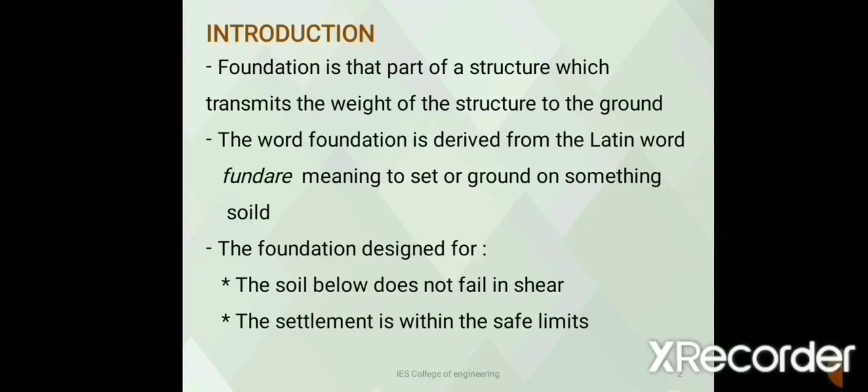We all know that every structure can be divided into two parts: the substructure and the superstructure. The major part of a substructure is the foundation, which transmits the weight of a structure to the ground. The word foundation is derived from the Latin word fundare, meaning to set or ground something solid. For every structure, the foundation must be designed with care. The major considerations while designing a foundation are that the soil below does not fail in shear and the settlement is within safe limits.

Now we are discussing what is bearing capacity of a soil. The stability of every structure is dependent upon the stability of the supporting soil. Every soil behaves in a complex manner when loaded, so it is important to know the bearing capacity of soils. The bearing capacity of any soil or rock is defined as its capacity to support the loads applied to the ground. It can also be defined as the maximum contact pressure between the soil and the structure.

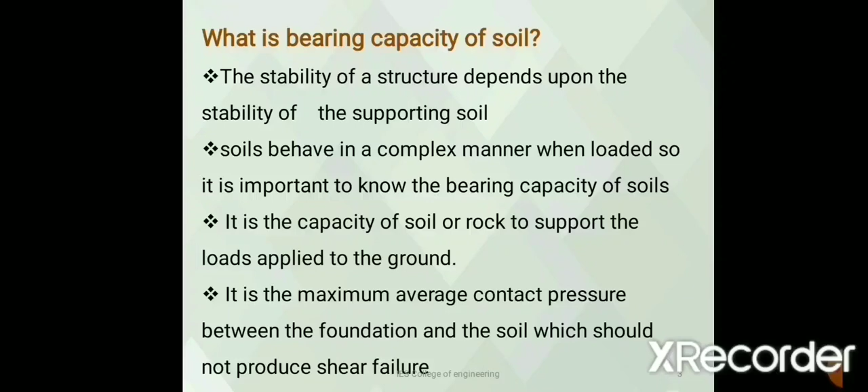So why is soil bearing capacity required? The stability of any foundation depends mainly on two factors: the bearing capacity of the soil beneath the foundation, and the settlement of the soil beneath the foundation. So it is important to know the bearing capacity of soils. The bearing capacity of any soil depends upon the shearing resistance of the soil, and the consolidation property of the soil determines its settlement characteristic.

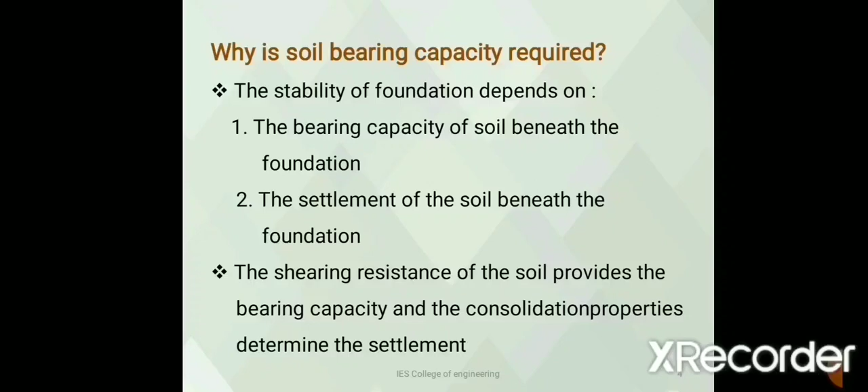Now we are discussing some basic definitions related to soil bearing capacity. The first one is ultimate bearing capacity, denoted by the symbol QU. The ultimate bearing capacity is defined as the gross pressure at the base of the foundation at which the soil fails in shear. The gross pressure includes the self-weight of the structure, overburden soil pressure, and all other loads acting on the foundation.

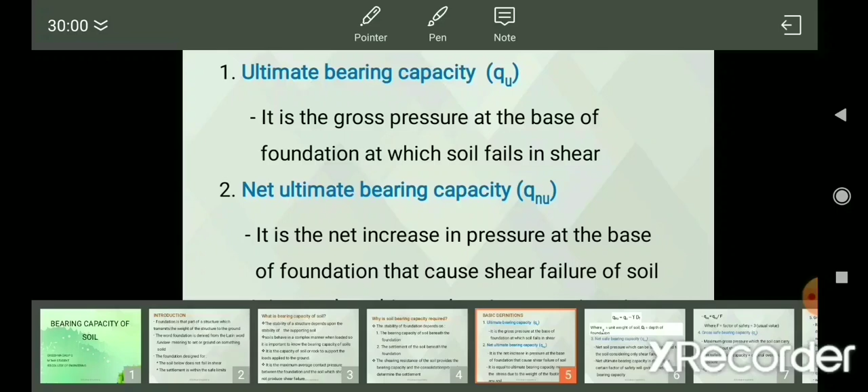The second one is net ultimate bearing capacity, denoted by the symbol QNU. It is defined as the net increase in pressure at the base of the foundation that causes shear failure of the soil. It is equal to the ultimate bearing capacity minus the stress due to the weight of the footing and any soil. Mathematically, QNU equals QU minus gamma dF, where QU is the ultimate bearing capacity, gamma is the unit weight of soil, and dF is the depth of foundation from the surface of the soil.

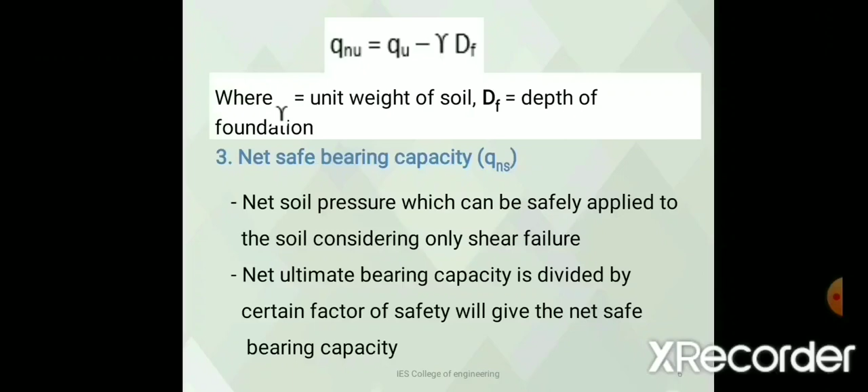The third term is net safe bearing capacity, denoted by the symbol QNS. As the name indicates, it is the net soil pressure which can be safely applied to the soil considering only shear failure. It is calculated by dividing the net ultimate bearing capacity by a certain factor of safety, usually taken as 3 for designing purposes. Mathematically, QNS equals QNU divided by F, where F is the factor of safety.

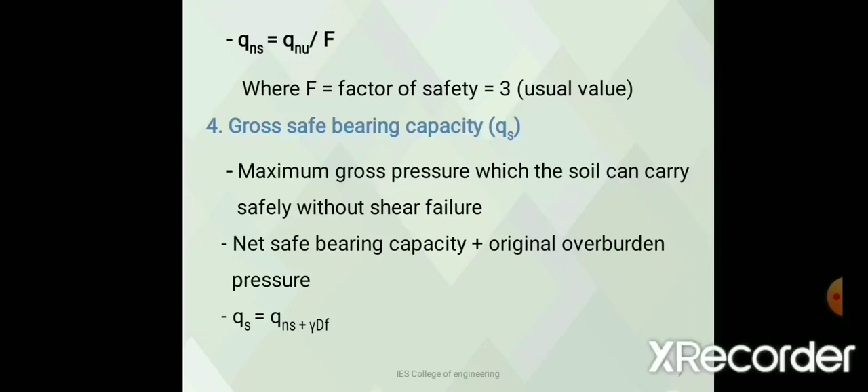The fourth one is gross safe bearing capacity, denoted by the symbol QS. It is the maximum gross pressure which the soil can carry without shear failure. It is calculated by adding the net safe bearing capacity and the original overburden pressure. Mathematically, QS equals QNS plus gamma dF.

The fifth one is gross pressure intensity, denoted by the small letter q. It is the total pressure at the base of the footing due to the weight of the superstructure, self-weight of the footing, and weight of the earth fill. The sixth term is net pressure intensity, denoted as Qn. It is the excess pressure, or difference in intensity of gross pressure after construction of a structure and the original overburden pressure. Mathematically, Qn equals Q minus sigma dash, where Q is the gross pressure intensity at the base of the footing and sigma dash is the effective overburden pressure.

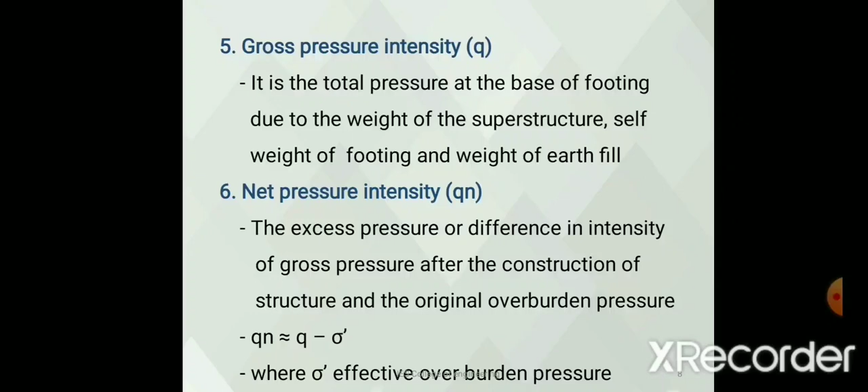The next one is net safe settlement pressure, QNP. It is the pressure with which the soil can carry without exceeding the allowable settlement. The maximum allowable settlement for every structure varies between 25 mm to 40 mm for individual footings. The net safe settlement pressure is also known as unit soil pressure or safe bearing pressure.

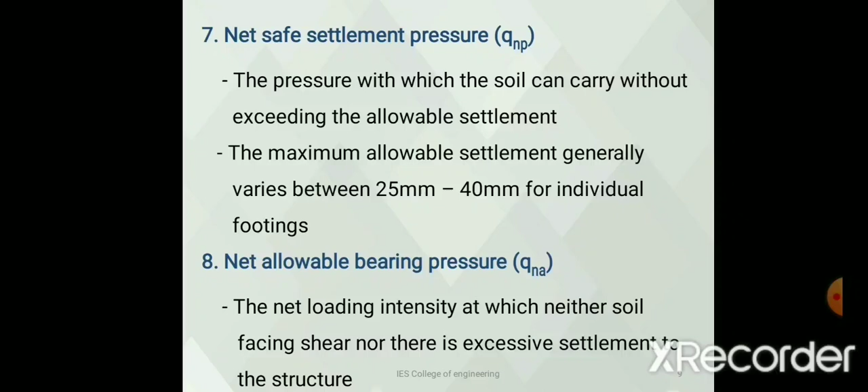The last one is net allowable bearing pressure, denoted by the symbol QNA. It is the net loading intensity at which neither does the soil fail in shear nor is there excessive settlement to the structure. In Terzaghi's bearing capacity theory, failure occurs when the downward pressure exerted by loads on the soil adjoining the inclined surfaces CB and CA of the soil wedge is equal to the upward pressure.

The downward forces are due to the load QU into B and the weight of the wedge, 1 by 4 gamma B square tan phi dash.

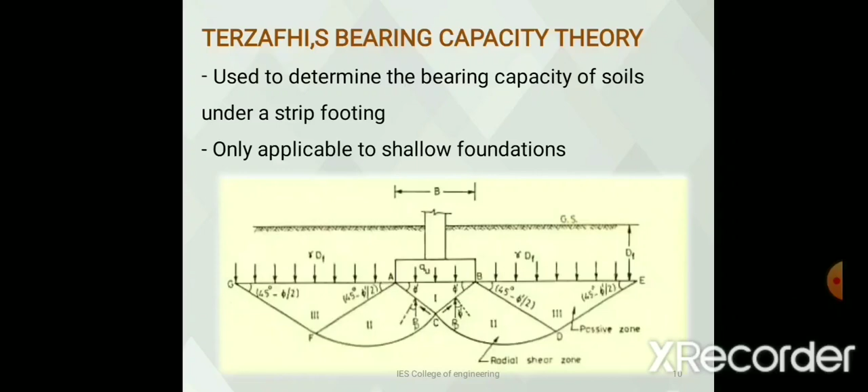The upward forces are the vertical component of the resultant passive pressure PP and the cohesion C dash acting along the inclined surfaces. As the resultant passive pressure is inclined at an angle phi dash to the normal to the surface of the wedge, it is vertical.

Therefore, from the equilibrium equation in the vertical direction, 1 by 4 gamma B square tan phi dash plus QU into B equal to 2PP plus 2 C dash into L sin phi dash, where L is the length of the inclined surface CB.

Therefore, QU into B equal to 2PP plus BC dash tan phi dash minus 1 by 4 gamma B square tan phi dash. The resultant passive pressure PP on the surfaces CB and CA constitute the following three components.

The first component is PP gamma, which is produced by the weight of the shear zone BCDE, assuming the soil is cohesionless, that is C dash equal to 0, and neglecting the surcharge Q.

The second component is PPC, which is produced by the cohesion component C dash of the soil, assuming the soil as weightless and gamma equal to 0, and neglecting the surcharge Q.

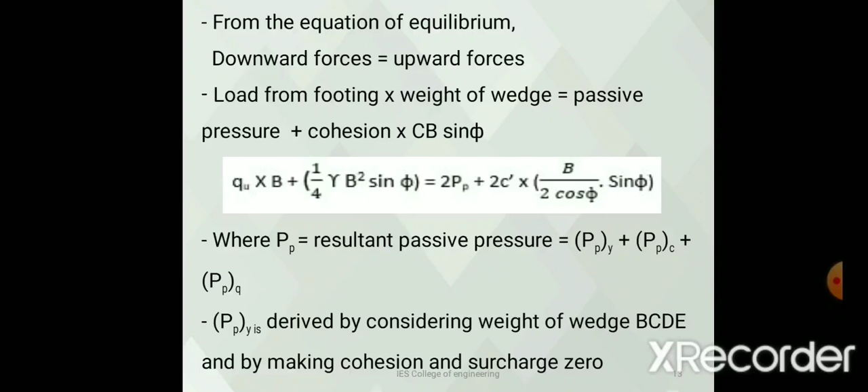Thus, the resultant passive pressure PP is taken equal to the sum of the components PPY plus PPC plus PPQ. So the resultant equation is QUB equal to 2 times PPY plus PPC plus PPQ plus BC dash tan phi dash minus 1 by 4 gamma B square tan phi dash.

Here, 2PPY minus 1 by 4 gamma B square tan phi dash equal to B into 0.5 gamma B N gamma.

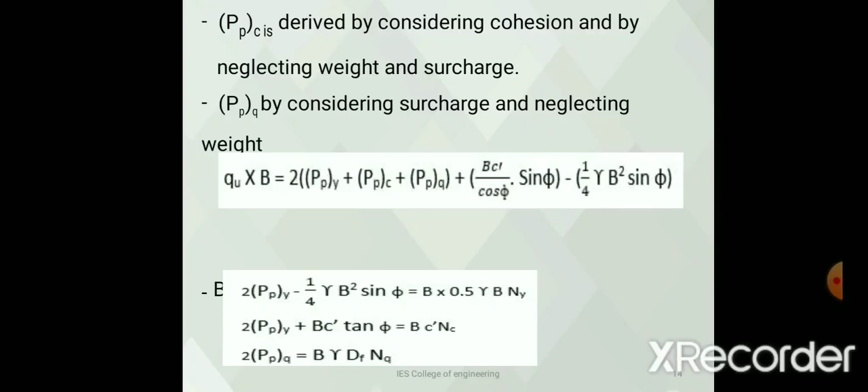2PPY plus BC dash tan phi can be denoted as BC dash NC, and 2PPQ equal to B gamma DF NQ. So the bearing capacity under a strip footing can be written as QU equal to C dash NC plus gamma DF NQ plus 0.5 B N gamma.

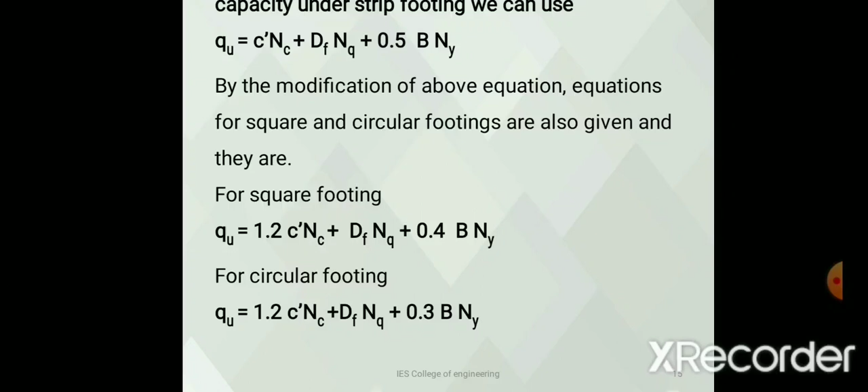By modification of the above equation, equations for square and circular footing are also given. For square footing, QU equal to 1.2 C dash NC plus gamma DF NQ plus 0.4 gamma B N gamma. For circular footing, QU equal to 1.2 C dash NC plus gamma DF NQ plus 0.3 gamma B N gamma.

So finally, QU equal to C dash NC plus gamma DF NQ plus 0.5 gamma B N gamma. This equation is called Terzaghi's bearing capacity equation, where QU is the ultimate bearing capacity, and NC, NQ and N gamma are the Terzaghi bearing capacity factors.

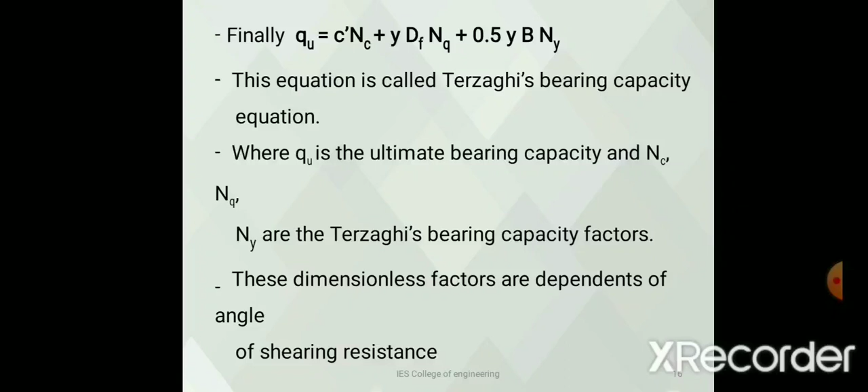These dimensionless factors are dependent on the angle of shearing resistance. The various equations to find the bearing capacity factors are NC equal to cot phi into A square divided by 2 cos square of 45 plus phi by 2 minus 1.

NQ equal to A square, all divided by 2 cos square of 45 plus phi by 2, and N gamma equal to 0.5 tan phi Kp divided by cos square phi minus 1, where A equal to e into 3 pi by 4 minus phi by 2.

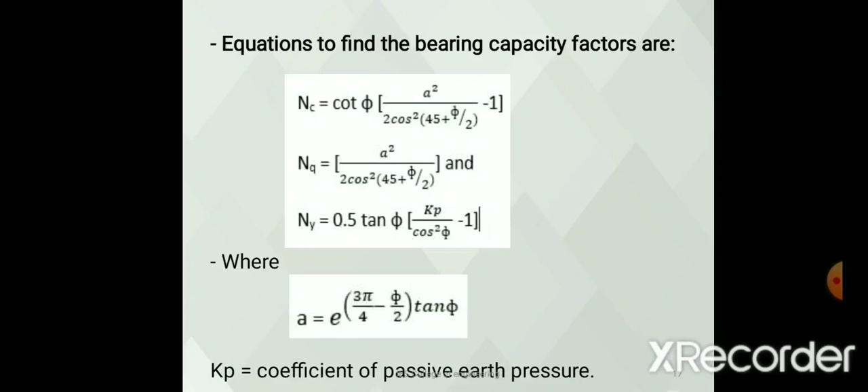Tan phi, and Kp is the coefficient of passive earth pressure.

So to determine the bearing capacity under a strip footing, QU equal to C dash NC plus gamma DF NQ plus 0.5 gamma B N gamma.

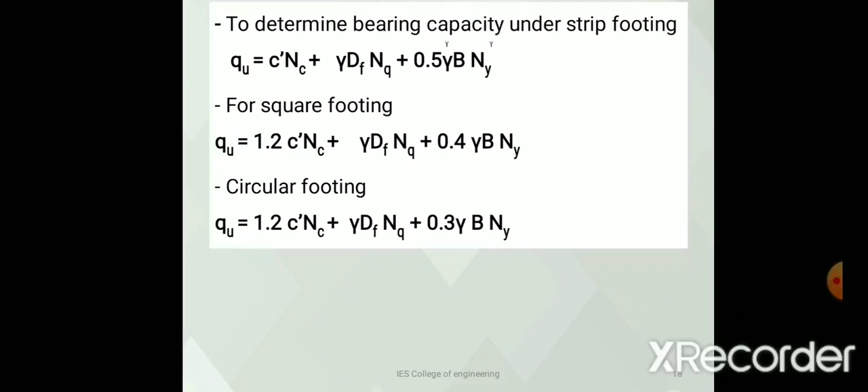For square footing, QU equal to 1.2 C dash NC plus gamma DF NQ plus 0.4 gamma B N gamma. For circular footing, QU equal to 1.2 C dash NC plus gamma DF NQ plus 0.3 gamma B N gamma.

So the next theory is Hansen's bearing capacity theory. Hansen modified the equation of Terzaghi by considering shape, depth and inclination factors.

According to Hansen, QU equal to C dash NC SC DC IC plus gamma DF NQ SQ DQ IQ plus 0.5 gamma B N gamma S gamma D gamma I gamma, where NC, NQ, N gamma are Hansen's bearing capacity factors, and SC, SQ and S gamma are shape factors, and DC, DQ and D gamma are depth factors.

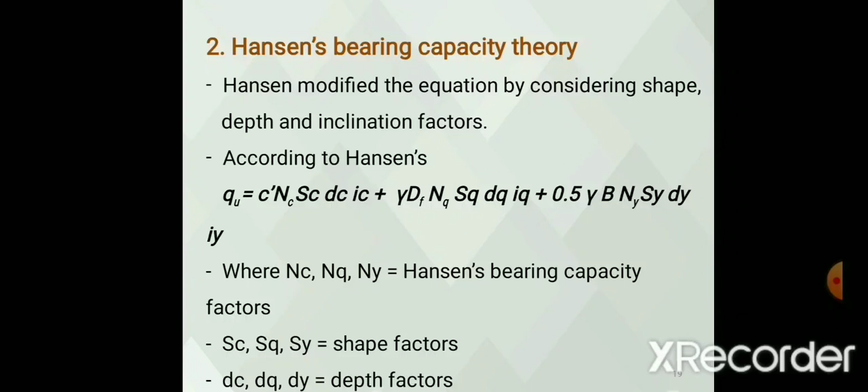So the bearing capacity factors are calculated as NQ equal to tan square of 45 plus phi by 2, e raised to pi tan phi. NC equal to NQ minus 1 cot phi. N gamma equal to 1.8 into NQ minus 1 tan phi.

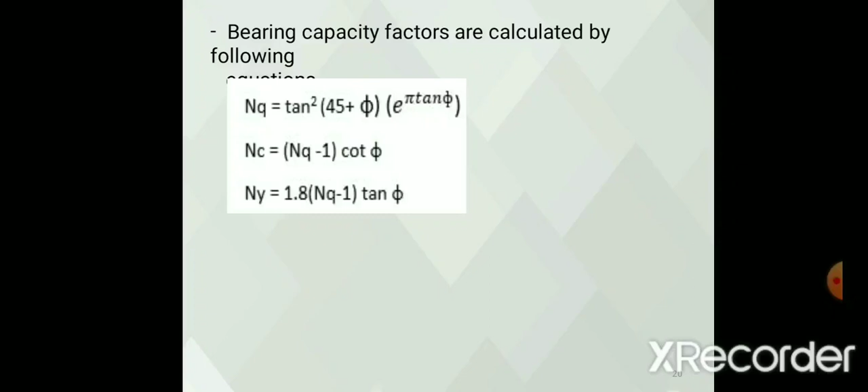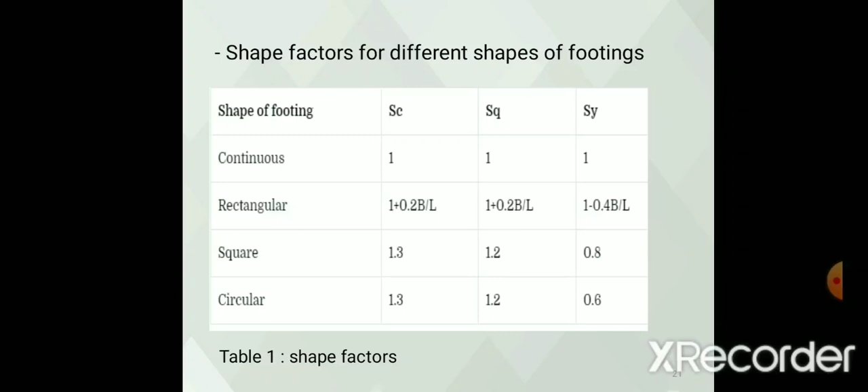These tables show the shape factors for different shapes of footings, and we can select the various shape factors from this table for calculation purposes.

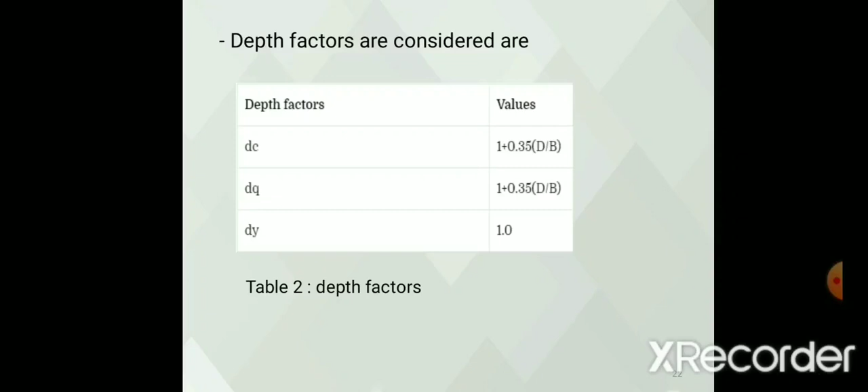This table shows the depth factors considered while designing any type of foundation, and these are the inclination factors considered while designing, where H is the horizontal component of the inclined load, B is the width of the footing, and L is the length of the footing.

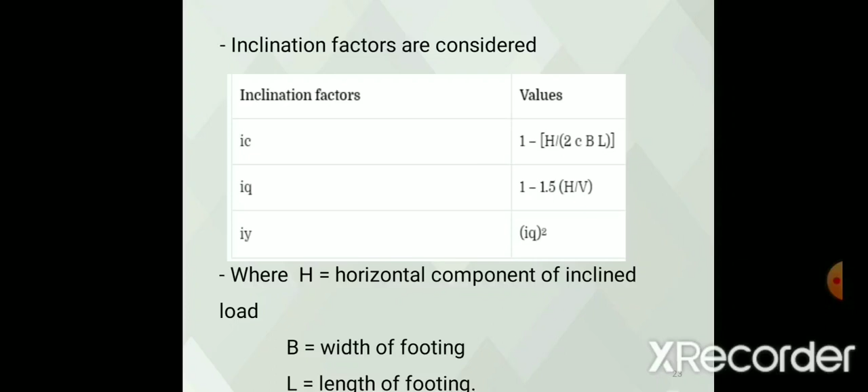Now we are discussing various types of shear failures. Vesic classified bearing capacity failures into mainly three types: the first is general shear failure, the second is local shear failure, and the third is punching shear failure. So first of all, we are discussing the features of general shear failure.

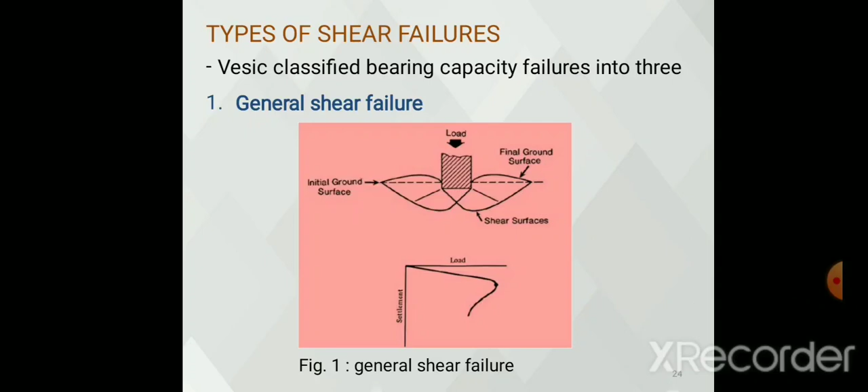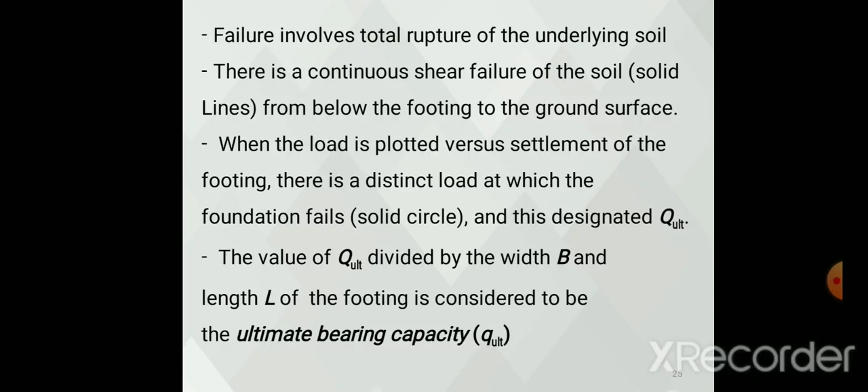The general shear failure involves total rupture of the underlying soil. There is a continuous shear failure of the soil, shown as solid lines from below the footing to the ground surface. When the load is plotted versus settlement of the footing, there is a distinct load at which the foundation fails, shown in the figure as a solid circle, designated as Q ultimate. The value of Q ultimate divided by the width B and length L of the footing is considered to be the ultimate bearing capacity. This has been defined as the bearing stress that causes a sudden catastrophic failure of the foundation.

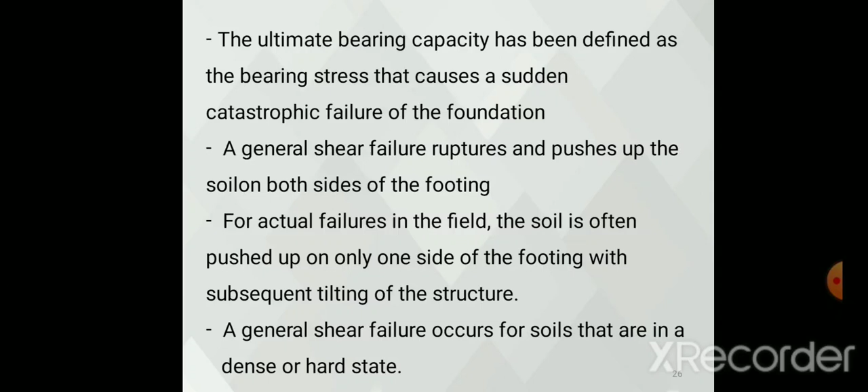A general shear failure ruptures and pushes up the soil on both sides of the footing. For actual failures in the field, the soil is often pushed up only on one side of the footing, with subsequent tilting of the structure. A general shear failure occurs for soils that are in a dense or hard state.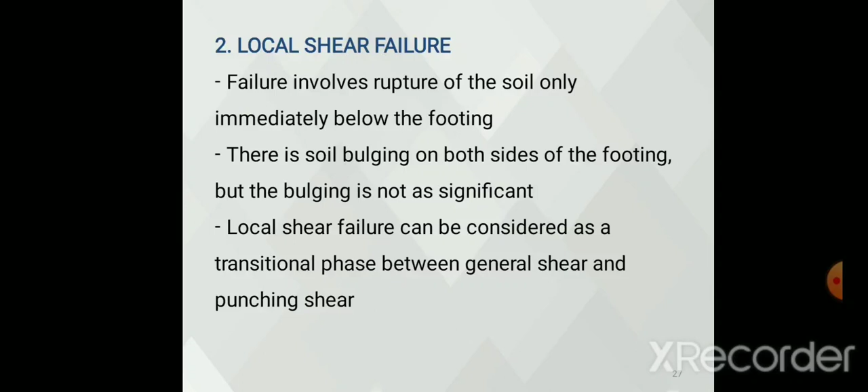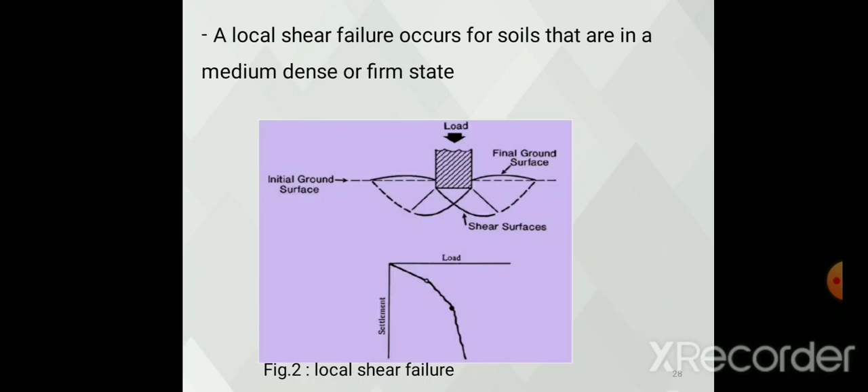The second type of failure is local shear failure. It involves rupture of the soil only immediately below the footing. There is soil bulging on both sides of the footing, but the bulging is not as significant as general shear failure. Local shear failure can be considered as a transitional phase between general shear and punching shear failure. This is the typical diagram showing local shear failure, which occurs for soils that are in a medium dense or firm state.

The third type of failure is punching shear failure. It does not develop the distinct shear surfaces associated with general shear failure. The soil outside the loaded area remains relatively uninvolved, and there is minimal movement of soil on both sides of the footing. The process of deformation involves compression of soil directly below the footing as well as vertical shearing of soil around the footing perimeter.

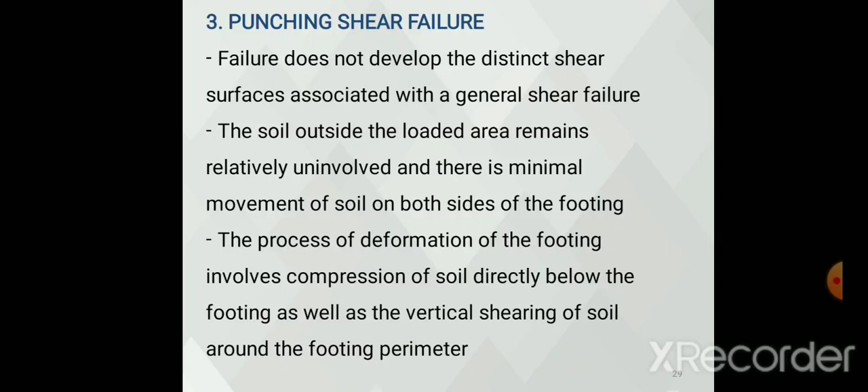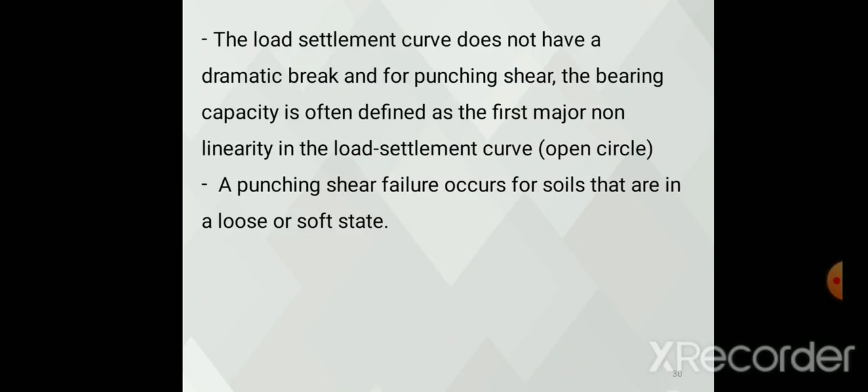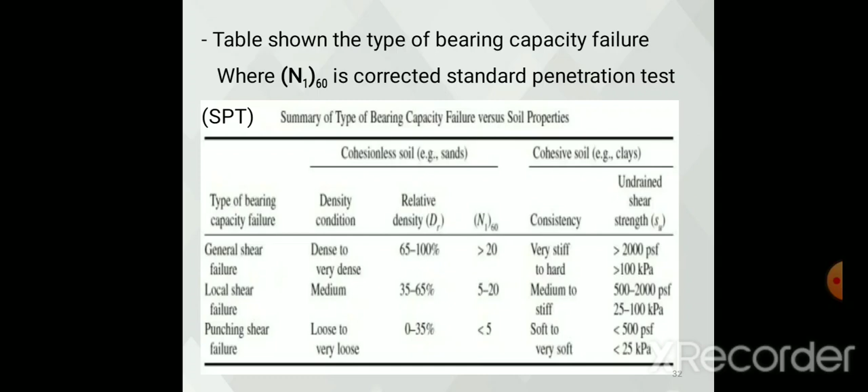Now we are dealing with problems related to bearing capacity of soils. The first one: a square footing 2.5 meter by 2.5 meter is built in a homogeneous bed of sand, density 2.0 tons per meter cube, having an angle of shearing of 38 degrees. The depth of the base of the footing is 1.5 meter below the ground surface. Calculate the safe load that can be carried by the footing with a factor of safety 3 against complete shear failure. Use Terzaghi's analysis.

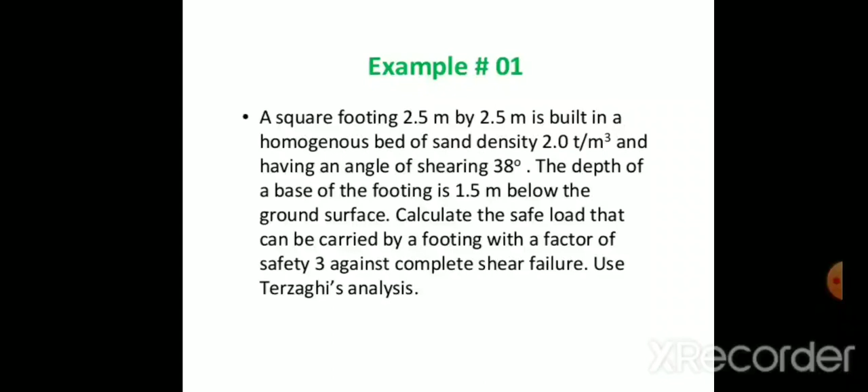The solution of this problem is, first of all, we deal with the given details. Here B equals 2.5 meter, D equals 1.5 meter, and gamma equals 2 tons per meter cube. Phi equals 38 degrees, which is greater than 36 degrees, so general shear failure will occur. So the value of bearing capacity factor NQ equals 47 and N gamma equals 64.

Since C equals 0, the ultimate bearing capacity QU equals gamma D NQ plus 0.4 gamma B N gamma. Substituting the values, we get the answer as 125 tons per meter square. So the maximum safe load equals B square into QS equals 2.5 square into 125 equals 780 tons.

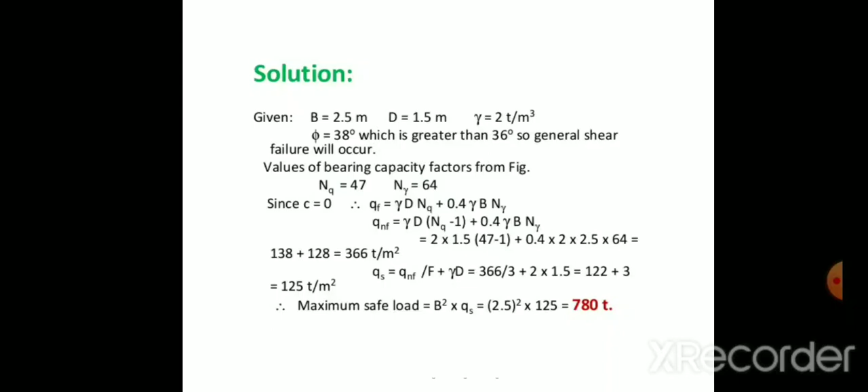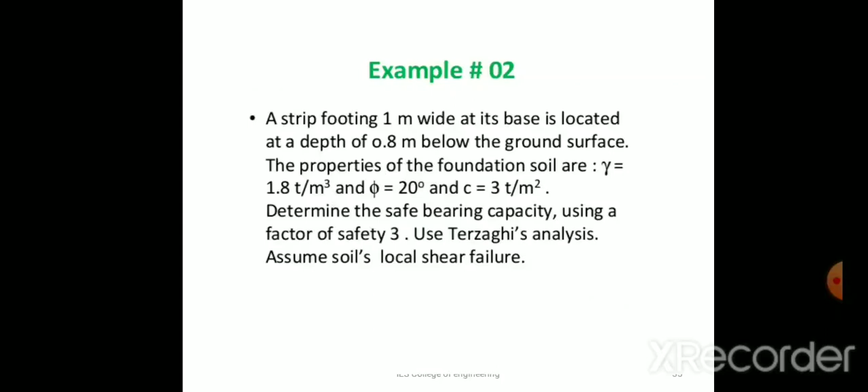The second problem is a strip footing 1 meter wide at its base, located at a depth of 0.8 meter below the ground surface. The properties of the foundation soil are gamma equals 1.8 tons per meter cube, phi equals 20 degrees, and C equals 3 tons per meter square. Determine the safe bearing capacity using a factor of safety 3. Use Terzaghi's analysis, assuming local shear failure.